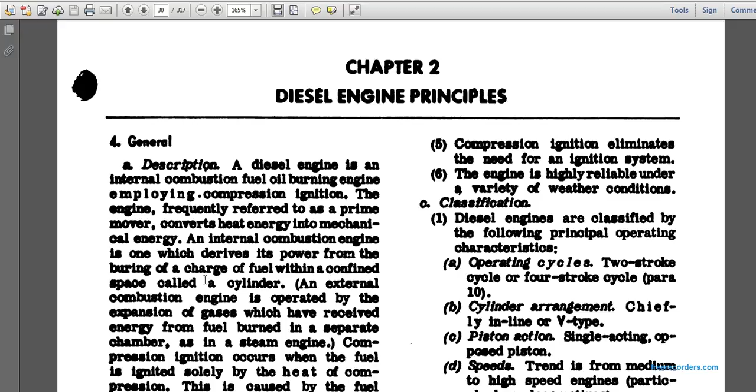An internal combustion engine derives its power from the burning of a charge of fuel confined in a space called the cylinder. An external combustion engine is operated by the expansion of gases which have received energy from fuel burned in separate chambers, as in the steam engine. Compression ignition occurs when the fuel is ignited solely by the heat of compression, caused by the fuel coming into contact with highly compressed and hence highly heated air in the cylinders.

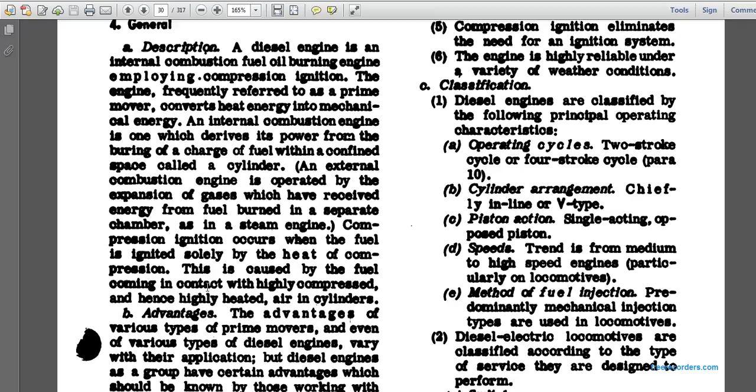The various types of prime movers, including the various types of diesel engines, vary in their application, but the diesel as a group has certain advantages which should be known by those working with them.

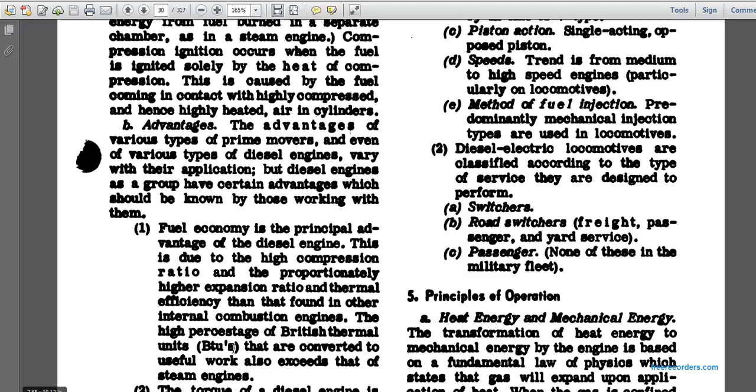Fuel economy is the principal advantage of the diesel engine. This is due to the high compression ratio and the proportionally high expansion ratio, giving thermal efficiency not found in other internal combustion engines. The high percentage of British thermal units (BTUs) that are converted to useful work also exceeds that of the steam engine.

The torque of the diesel engine is fairly constant throughout the speed range, and therefore the engine pulls well at low speeds.

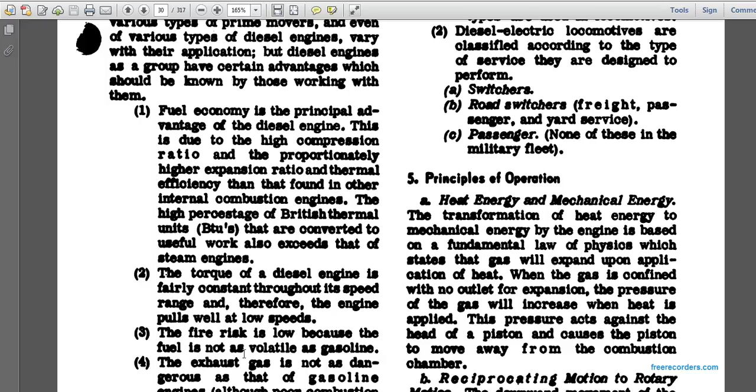The fire risk is low because the fuel is not as volatile as gasoline. The exhaust gas is not as dangerous as that of a gasoline engine, although poor combustion causes a high concentration of carbon monoxide fumes.

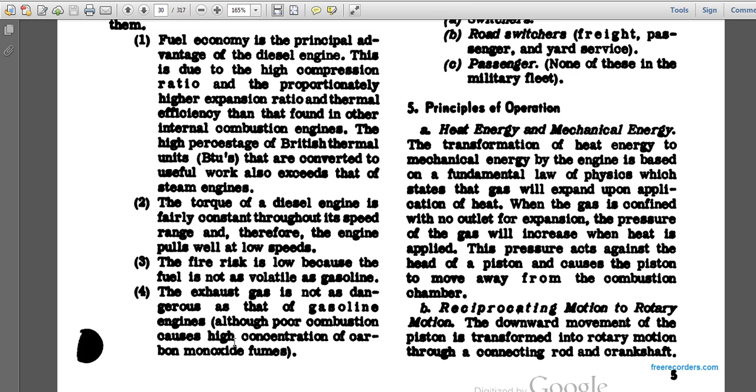The compression ignition eliminates the need for an ignition system. The engine is highly reliable under a variety of weather conditions.

Classification: Diesel engines are classified by the following operating principles and characteristics. A, the operating cycle: 2-stroke cycle or 4-stroke cycle. B, the cylinder arrangement: chiefly inline or V-type. C, the piston action: single-acting or opposed piston. D, the speed, ranging from medium to high-speed engines, particularly on locomotives. E, the method of fuel injection, predominantly the mechanical injection type used in locomotives.

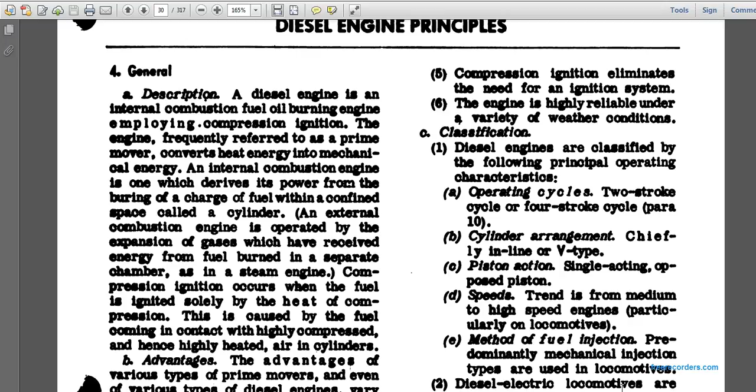Diesel electric locomotives are classified according to the type of service they are designed to perform: switchers, road switchers, which handle freight and passenger yard services. None of these are military fleet.

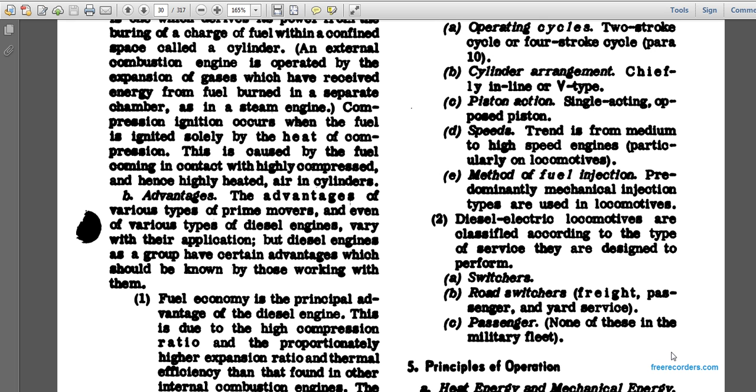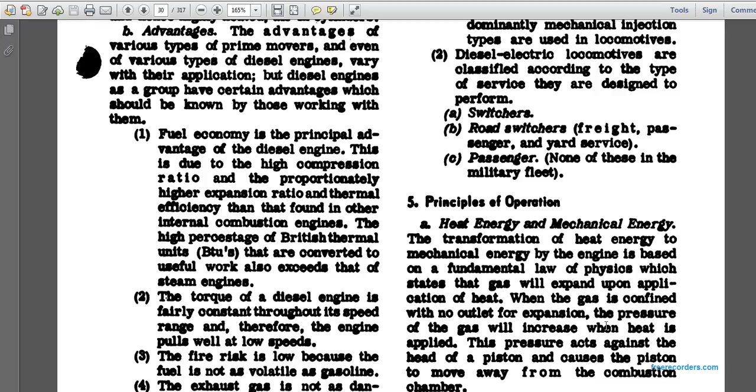The principles of operation, the heat energy and the mechanical energy, the transformation of heat energy to mechanical energy is based on the fundamental law of physics, which states that gas will expand upon application of heat. When the gas is confined with no outlet for expansion, the pressure of the gas increases with the heat. The pressure acts against the head of the piston, causing the piston to move away from the combustion chamber.

The reciprocating motion becomes rotary motion. The downward movement of the piston is transformed into rotary motion through the connecting rod and the crankshaft.

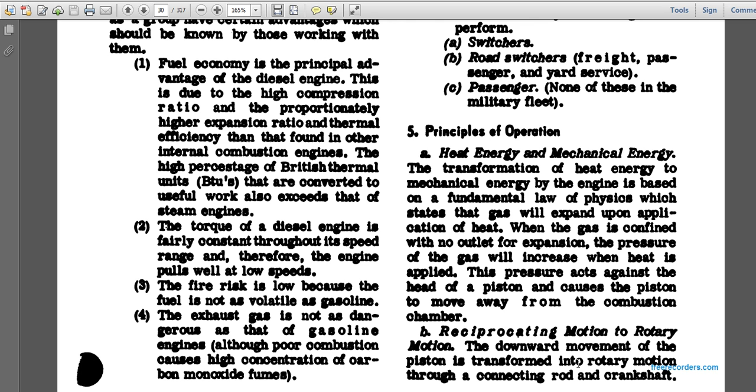The cylinder is a hollow tube closed at the upper end by the cylinder head. The piston moves inside the cylinder. The connecting rod is straight, and its upper end is attached to the bottom of the piston.

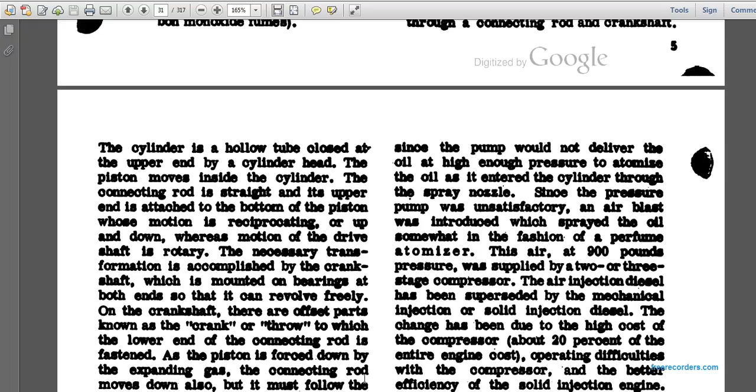When the motion is reciprocating up and down, while the motion of the drive shaft is rotary, the necessary transformation is accomplished by the crankshaft, which is mounted in bearings at both ends so that it can revolve freely. One of the crankshaft's offset parts is known as the crank or the throw, to which the lower end of the connecting rod is fastened.

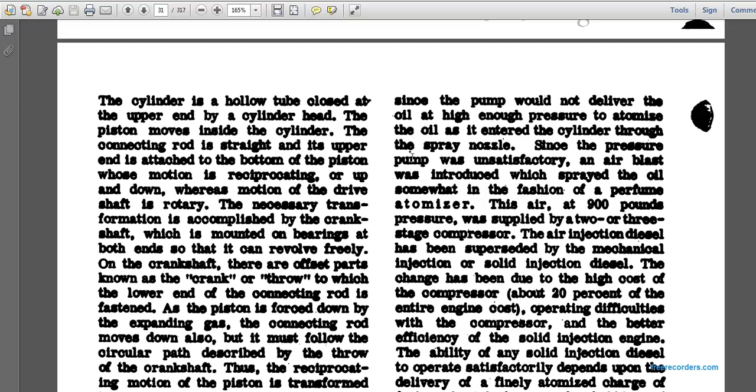The piston is forced down by the expanding gas, the connecting rod moves down, and it must follow the circular path described by the throw of the crankshaft. Thus, the reciprocating motion of the piston is transformed into the rotating movement of the crankshaft.

Factors necessary for proper function of the diesel engine: four factors are necessary for proper combustion in the diesel engine: air, fuel, compression, and ignition.

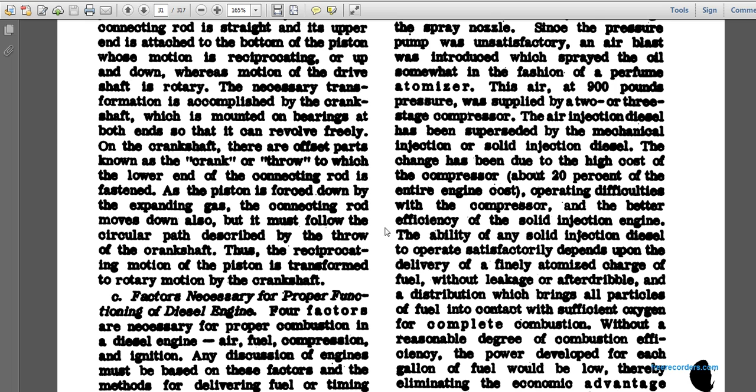Any discussion of the engines must be based on these factors and the methods of delivering the fuel and timing of the combustion chamber. The principal difference between the diesel engine and the gasoline engine is the method of igniting the fuel.

Pure air is compressed to a high temperature before any fuel is delivered in a diesel engine, which differs from the air-fuel mixture delivered by carburetors in gasoline engines.

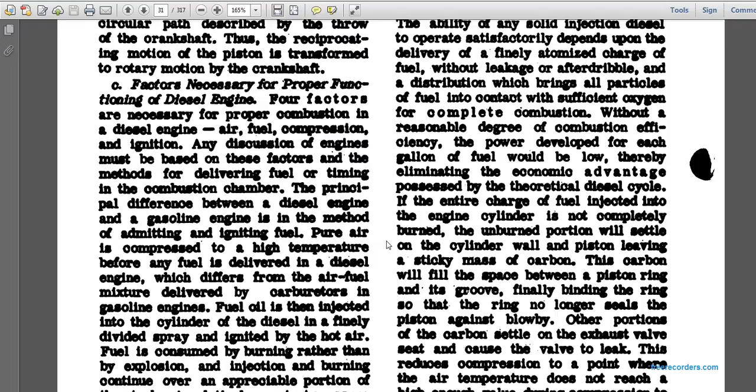Fuel oil is injected into the cylinder of the diesel and finely divided spray and ignited by the hot air. The fuel is consumed by burning rather than explosion, continuing through the appreciable portion of the stroke. Relatively constant pressure is thereby maintained during the entire power stroke. The characteristic of the diesel engine classification is the constant pressure engine.

Combustion principles: In the first diesel engine, fuel oil was injected into the cylinder by the pressure of the pump. The result was poor, since the pump was not delivering the oil at high enough pressure to atomize the oil that entered the cylinder through the spray nozzle.

Since the pressure of the pump was insufficient, the injection of the air blast introduced with the sprayed oil somewhat in the fashion of a perfume atomizer. This air at 900 pounds of pressure was supplied at 2 to 3 stages of compressors.

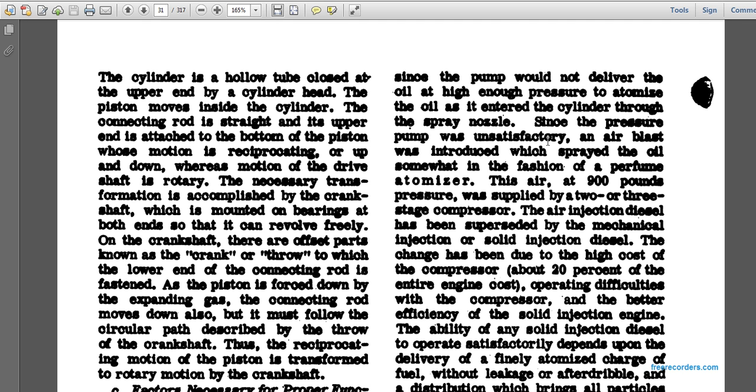The air injection diesel had been superseded by the mechanical injection or solid injection diesel. The change has been due to the high cost of the compressor. About 20% of the entire engine cost, operating difficulties with the compressor.

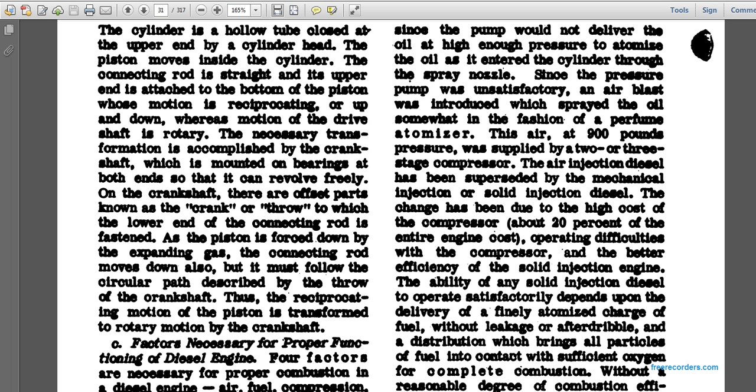The better efficiency of the solid injection engine and its ability to operate satisfactorily depends upon the delivery of finely atomized fuel charges without leakage or afterdribble, and distribution which brings all particles of the fuel into contact with sufficient oxygen to complete combustion with a reasonable degree of combustion efficiency.

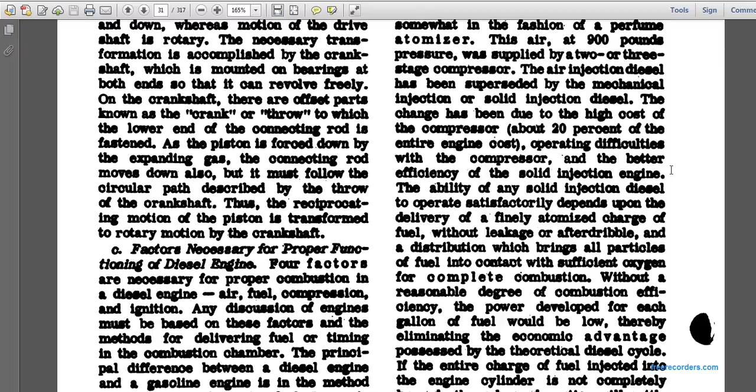The power developed for each gallon of fuel would be low, thereby eliminating the economic advantage possessed by the theoretical diesel engine cycle. If the entire charge of fuel injected into the engine cylinder is not completely burned, and the unburned portion will settle on the cylinder wall and piston.

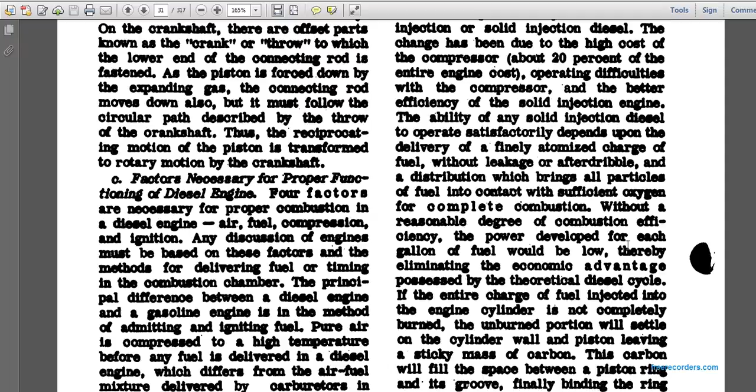This leaves a sticky mass of carbon. The carbon will build up between the piston ring and its groove, finally binding the ring so that it no longer seals against the piston, causing blow-by.

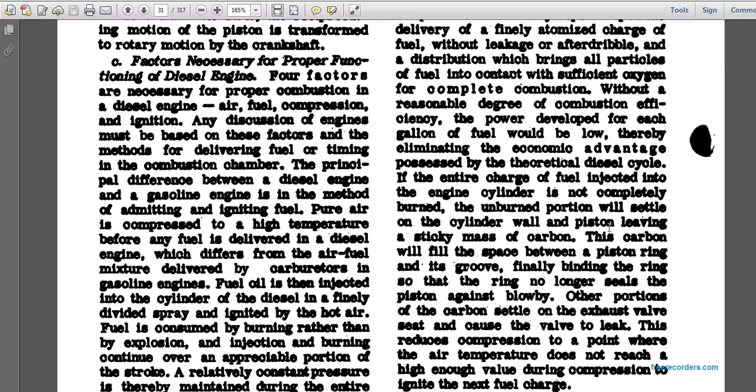Other portions of the carbon settle on the exhaust valve seat, causing the valve to leak. This reduces compression to the point where the air temperature does not reach a high enough value during compression to ignite the next fuel charge.

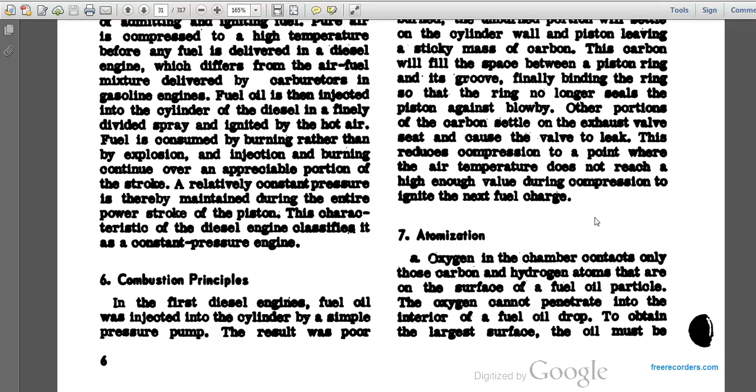Atomization: The oxygen charge in the chamber contacts only those carbon and hydrogen atoms that are on the surface of the fuel oil particle. The oxygen cannot penetrate into the interior of the fuel oil drop.

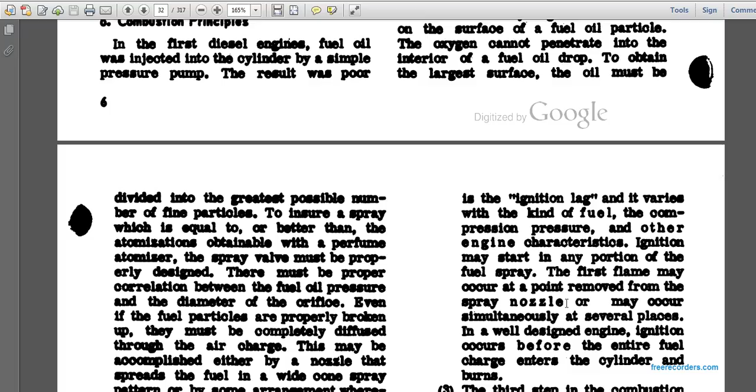To obtain the largest surface area, the oil must be divided into the greatest possible number of fine particles to ensure a spray equal to or better than the atomization obtained by perfume atomizers.

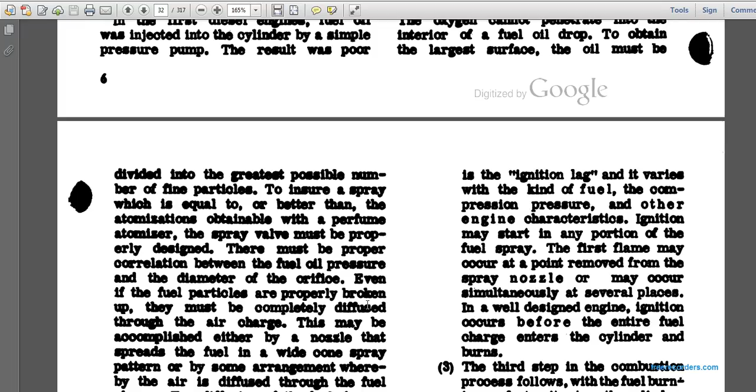This may be accomplished either by the nozzle spreading the fuel in a wide cone spray pattern, or by some arrangement where the air is diffused through the fuel charge.

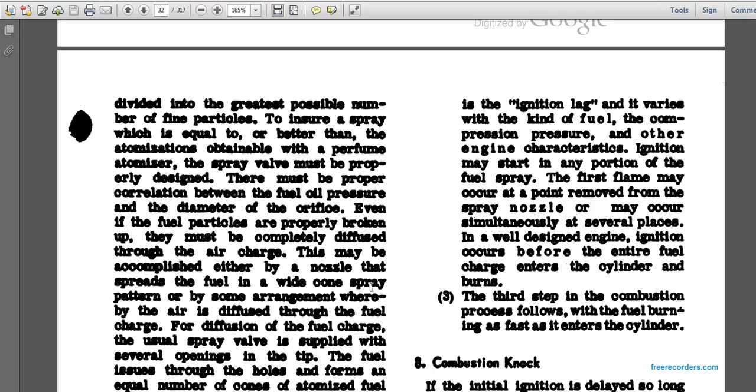Usually the spray nozzle is supplied with several openings in the tip. The fuel issues through the holes, forming an equal number of cones of atomized fuel which effectually fill the combustion space.

Combustion space. I lost my spot.

Even the fine particles broken down must be completely diffused in the air charge. This may be accomplished by the nozzle spraying the fuel in a wide spray pattern, in some arrangement where it diffuses through the fuel charge.

This diffusion of the fuel charge: usually the spray nozzle is supplied with several openings in the tip. The fuel issues through the holes, forming equal numbers of cones atomized efficiently within the combustion space in the engine cylinder.

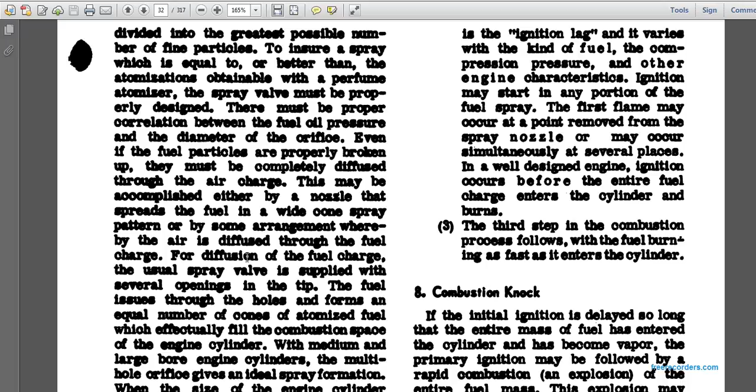With a medium to large bore engine cylinder, the multi-hole orifice gives an ideal spray formation. As the size of the engine cylinder decreases, high-speed engines are classed as small bore, and the amount of fuel injected into the engine cylinder is very small. The diameter of each of the spray valve openings must be exceedingly small.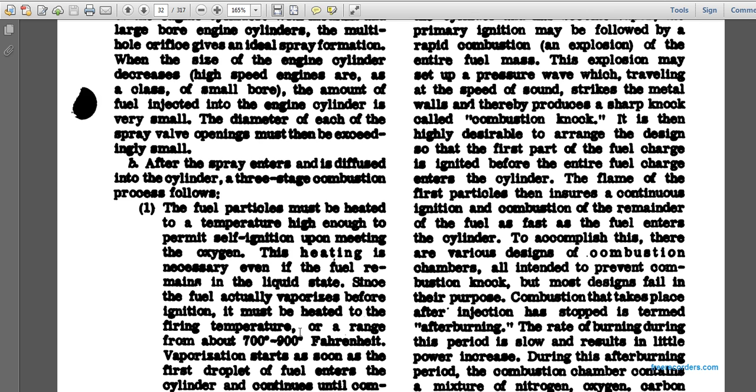After the spray enters into the cylinder, a three-stage combustion process follows. The fuel particles must be heated to a temperature high enough to permit self-ignition upon meeting oxygen. This heating is necessary even if the fuel remains in a liquid state. Since the fuel actually vaporizes before ignition, it must be heated to a firing temperature range of about 700 to 900 Fahrenheit. Vaporization starts as soon as the first droplet entering the cylinder and continues until combustion occurs.

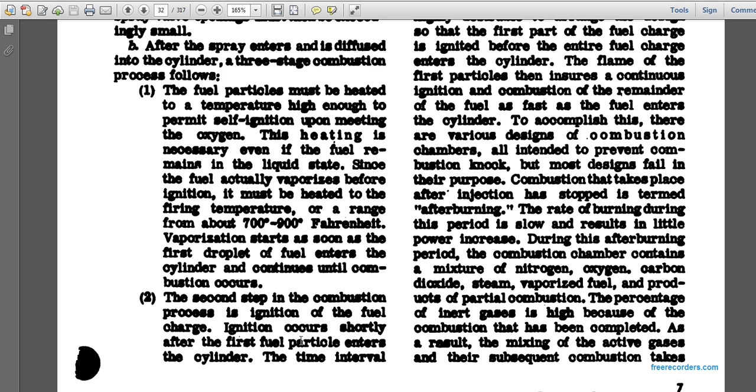The second step of the combustion process is ignition of the fuel charge. Ignition occurs shortly after the first fuel particles enter into the cylinder. This time interval is the ignition lag, which varies with the kind of fuel, the compression pressures, and other engine characteristics. Ignition may start in any portion of the fuel spray; the first flame may occur at a point removed from the spray nozzle, or may occur simultaneously at several places. In a well-designed engine, ignition occurs before the entire fuel charge enters the cylinder and burns.

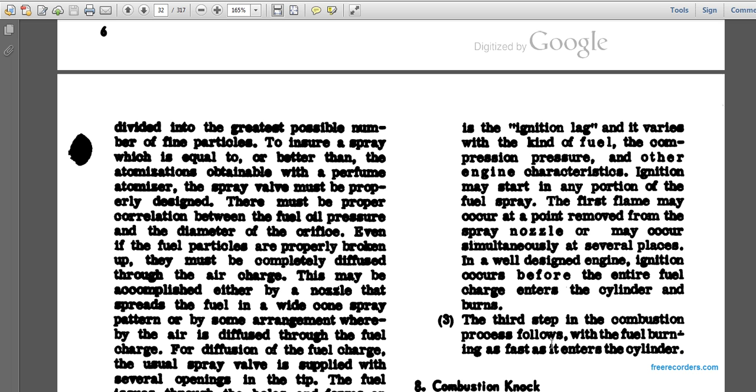The third step in the combustion process follows, with the fuel burning as fast as it enters into the cylinder.

Combustion knock: if the initial ignition is delayed so long that the entire mass of fuel entered into the cylinder has become vapor, the primary ignition may be followed by rapid combustion or explosion of the entire fuel mass. The explosion may set up a pressure wave which, traveling at the speed of sound, strikes the metal of the walls, thereby producing a sharp knock called the combustion knock.

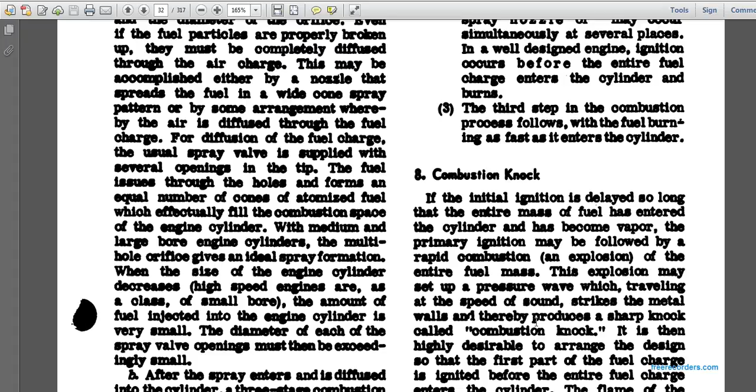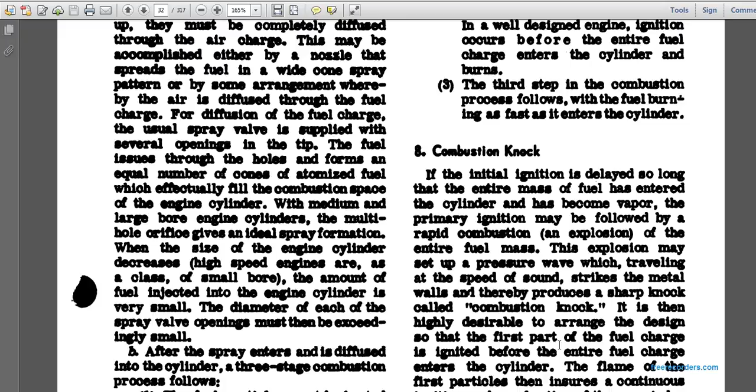It is therefore highly desirable to arrange the design so that the first part of the fuel charge is ignited before the entire fuel charge enters into the cylinder. The flame of the first particles ensures continuous ignition and combustion of the remainder of the fuel as it enters the cylinder. To accomplish this, there are various designs of combustion chambers, all intended to prevent combustion knock.

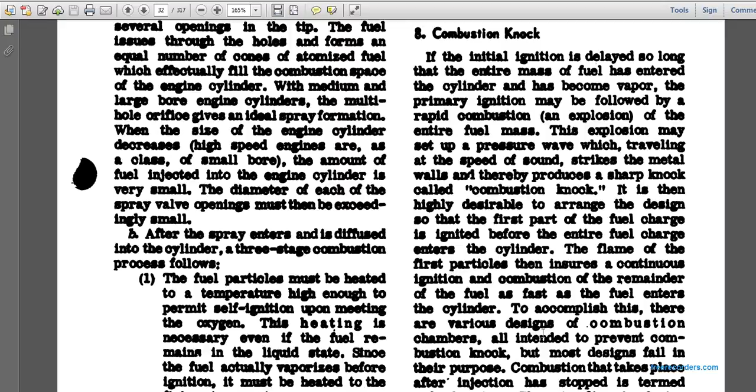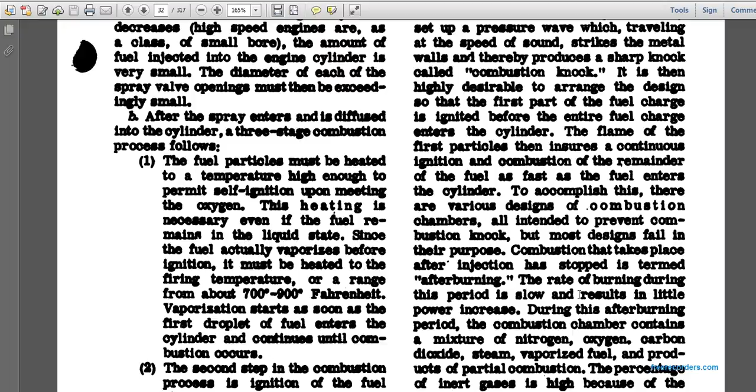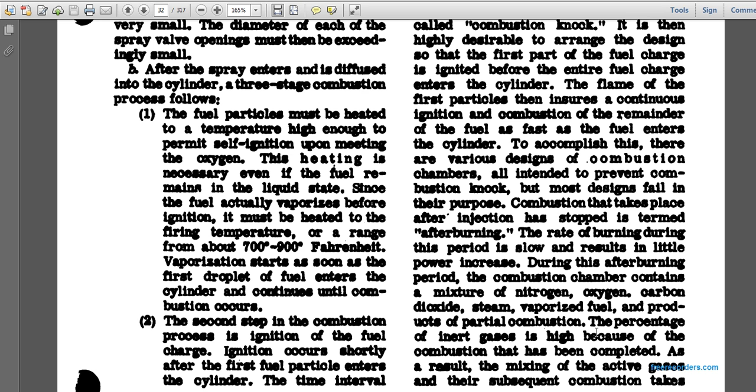The late burning at a low expansion rate decreases the overall cycle efficiency of the engine, although the final combustion efficiency may be high. There is difficulty in obtaining the proper mixture of fuel and air, securing the efficiency of combustion, especially with increasing engine speed.

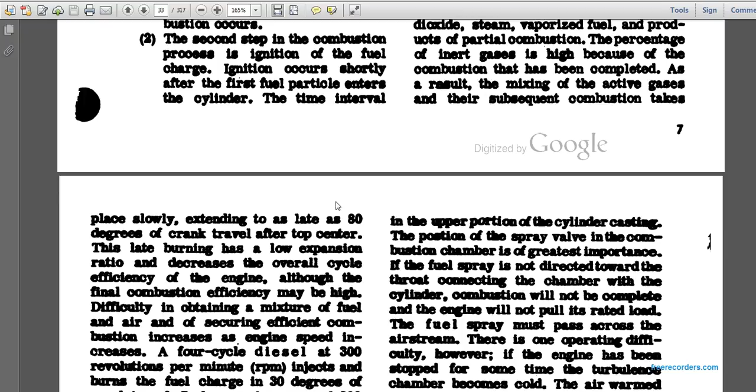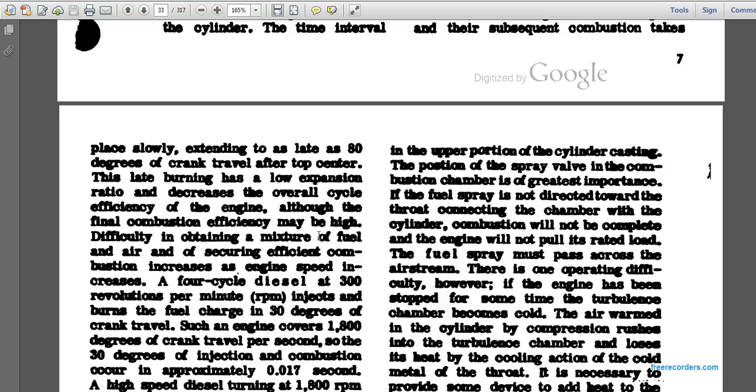A 4-cycle diesel engine at 300 revolutions per minute injects and burns the fuel charge in 30 degrees of crank travel. Such an engine covers 1800 degrees of crank travel per second, so 30 degrees of injection means combustion occurs in approximately 0.017 of a second.

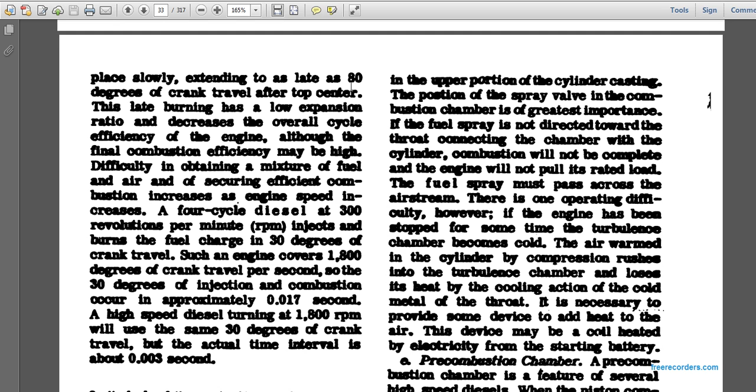The high-speed diesel engine turning at 1800 RPM will use this same 30 degrees of crank travel, but the actual time interval is about 3 thousandths of a second.

Method of mixing air with fuel: generally, the method of moving air within the diesel engine cylinder across the fuel stream varies, and different engine methods are common, such as those found in locomotive or military fleet engines, as described below. The entrance swirl: the air flowing into the engine cylinder may follow a circular path, continuing to move during the compression stroke as the fuel is sprayed into the cylinder, with the air moving through the fuel spray.

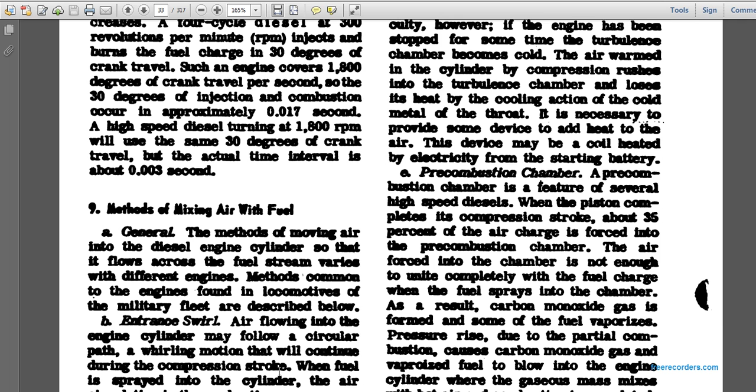This increases the mixture of the air and the fuel. Piston swirl. The piston has the concave crown. The air between the cylinder head and the outer surface of the piston crown is forced into the concave section as the piston approaches the

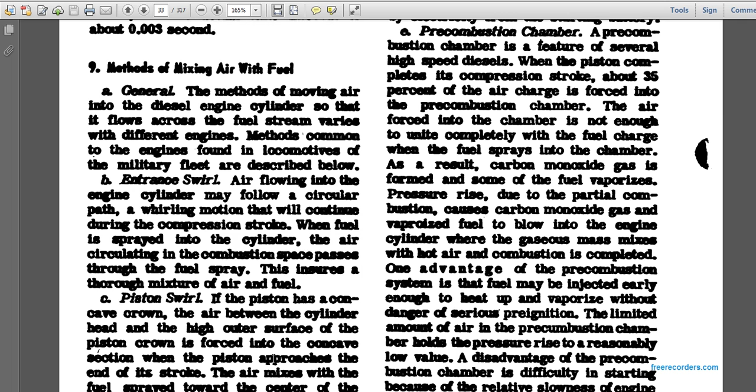Piston swirl. The piston has a concave crown, and the air between the cylinder head and the higher outer surfaces of the piston crown is forced into the concave as the piston approaches the end of the stroke, and the air mixes with the fuel spray toward the center of the piston.

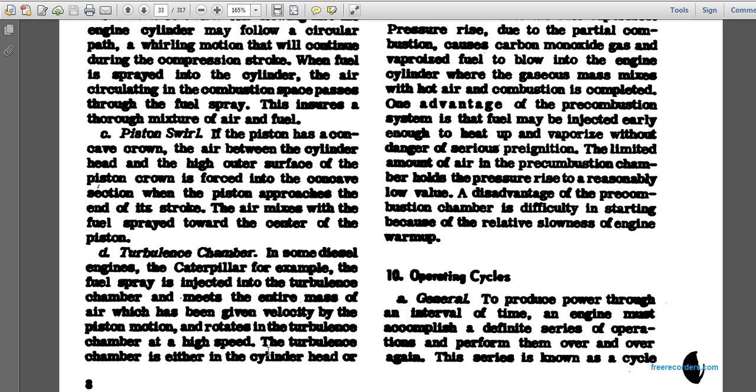The turbulence chamber. In some diesel engines, the Caterpillar for example, the fuel spray is injected into the turbulence chamber and meets the entire mass of the air, which has been given velocity by the piston motion and rotates in the turbulence chamber at high speed. The turbulence chamber is in either the cylinder head or the upper portion of the cylinder casting. The position of the spray valve of the combustion chamber is of the greatest importance. If the fuel spray is not directed toward the throat connecting the chamber with the cylinder, combustion will not be complete and the engine will not pull its rated load; the fuel spray must be across the airstream. There is an operating difficulty, however.

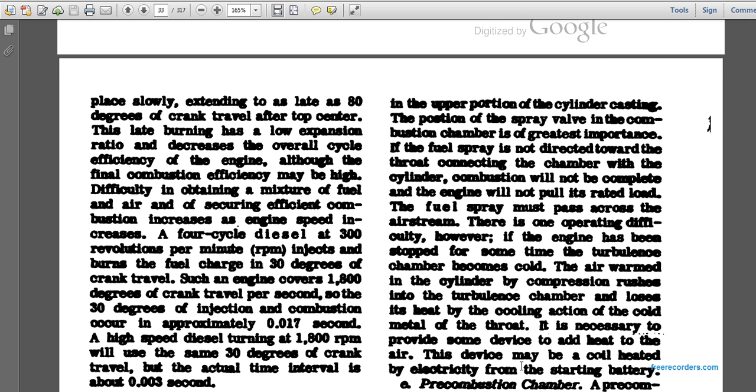If the engine has been stopped for some time, the turbulence chamber becomes cold. The air warmed in the cylinder by compression rushes into the turbulence chamber and loses its heat through the cooling action of the cool metal of the throat. It's necessary to provide some device to add heat to the air. The device may be a coil heated by electricity from the starting battery.

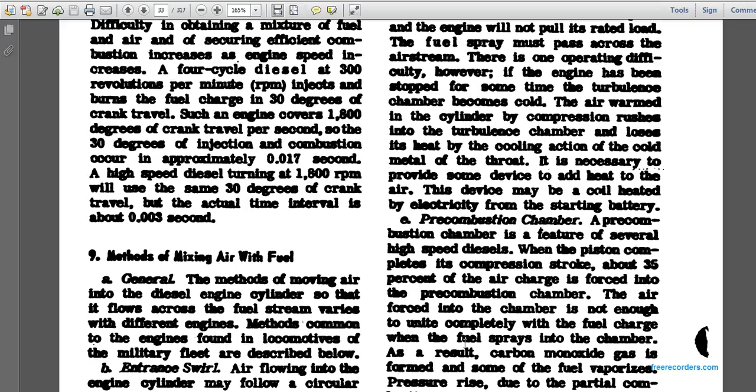Pre-combustion chamber. The pre-combustion chamber is a feature of several high-speed diesels. When the piston completes the compression stroke, about 35% of the air charge is forced into the pre-combustion chamber. The air forced into the chamber is not enough to unite completely with the fuel charge. When the fuel sprays into the chamber, carbon monoxide is formed, and some of the fuel vaporizes; partial combustion and cause carbon monoxide gas and vaporized fuel to blow into the engine cylinder, where the gas mass mixes with the hot air and combustion is completed.

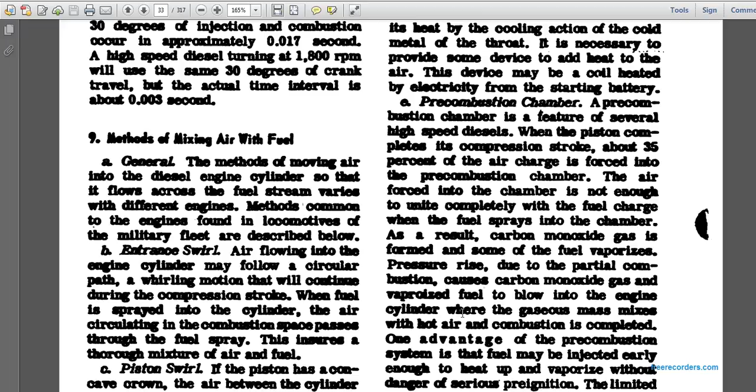One advantage of the pre-combustion system is that the fuel may be injected early enough to heat up and vaporize without the danger of serious pre-ignition, and the limited volume of the pre-combustion chamber holds the pressure at a reasonably low value. A disadvantage of the pre-combustion chamber is difficult starting because of the relative slowness of the engine warm-up.

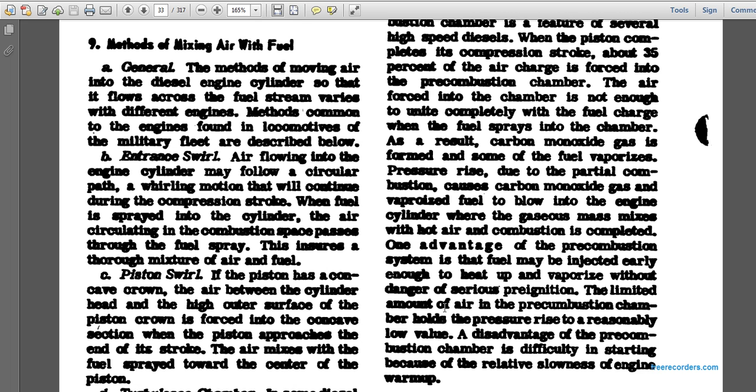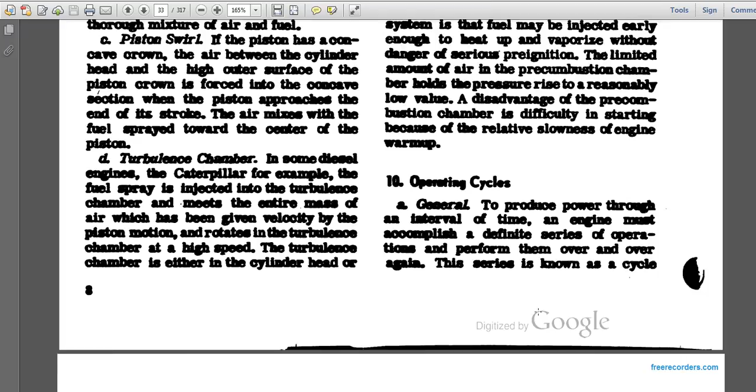Operating cycles. Generally, to produce power through an interval of time, an engine must accomplish a definite series of operations, performing them over and over again. The series is known as a cycle, in which suction, compression, ignition, expansion, and exhaust take place in the order listed. An engine that requires four strokes of the piston, two revolutions of the crankshaft, to complete the cycle is known as a 4-cycle engine. Figure 1-1. An engine completing the cycle in two strokes of the piston, one revolution of the crankshaft, is known as a 2-stroke engine.

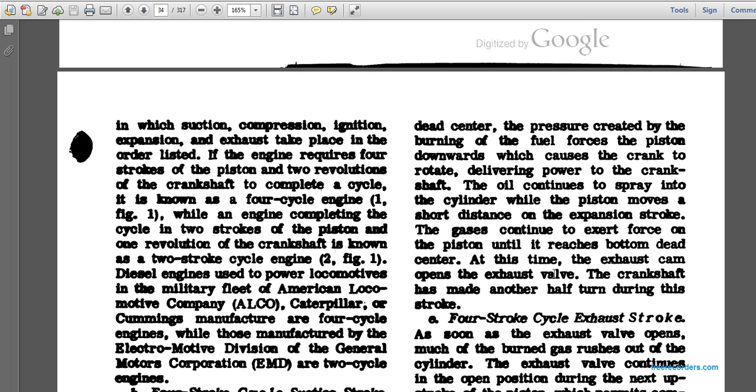Figure 1. The diesel engines used in the locomotives of the military fleet: American Locomotive Company, ALCO, Caterpillar, and Cummins manufacture 4-cycle engines; those manufactured by the Electro-Motive Division of the General Motors Corporation, EMD, are 2-cycle engines. The 4-stroke cycle: the suction stroke.

The suction stroke begins with the piston at top dead center. The piston moves downward, and the charge of fresh air is drawn into the cylinder through the inlet valve, which is held open by the cam. The air passage is closed as the piston reaches the bottom of the stroke. The crankshaft has then made a half revolution during the stroke.

The second stroke of the cycle, compression. The piston reaches the bottom of the stroke, and the inlet valve is closed by the spring as the high point of the cam rotates from under the push rod. Bottom dead center has been passed, the piston being forced upward toward the cylinder head. Inlet and exhaust valves are closed, and the upward travel of the piston compresses the air in the cylinder. At the end of the compression stroke, a charge of oil is injected through the spray valve into the cylinder.

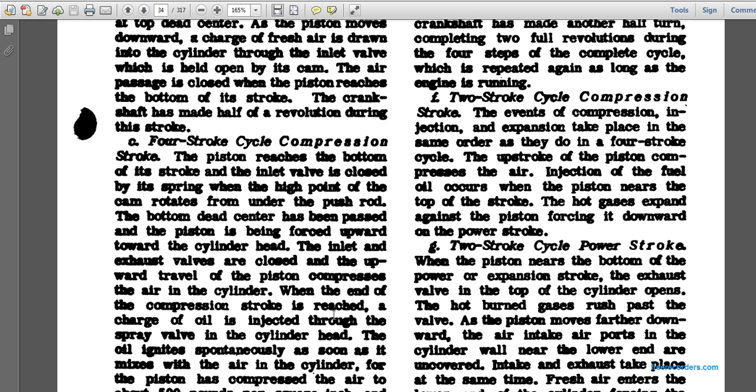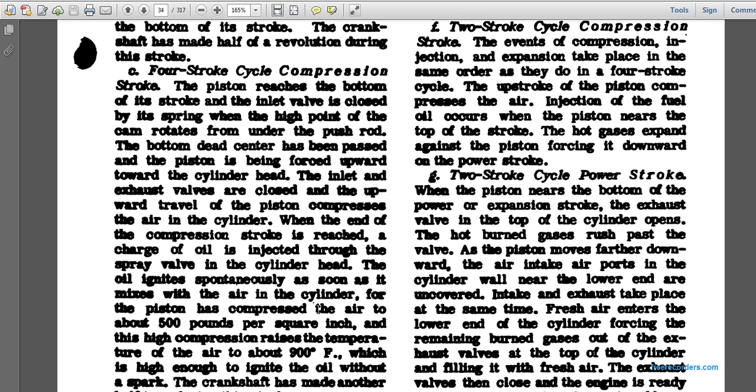The oil ignites spontaneously as soon as it mixes with the air in the cylinder. The piston compresses the air to about 500 pounds per square inch. High compression raises the temperature of the air to about 900 degrees Fahrenheit, which is high enough to ignite the oil without a spark. The crankshaft has made another half turn during the stroke.

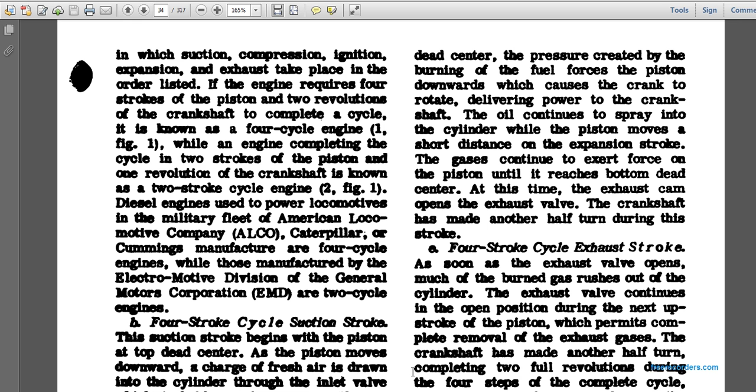The 4-stroke cycle expansion stroke starts as soon as the crank moves past top dead center. The pressure created by the burning of the fuel forces the piston downward to cause the crank to rotate, delivering power to the crankshaft. The oil continues to spray into the cylinder while the piston moves a short distance. With the expansion stroke, the gas continues to exert force on the piston until it reaches bottom dead center. At this time, the exhaust cam opens the exhaust valve, and the crankshaft has made another half turn during this stroke.

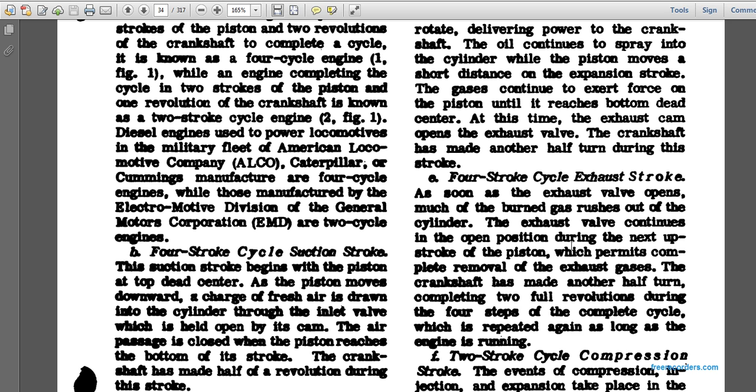The 4-stroke cycle exhaust stroke. As soon as the exhaust valve is open, most of the burned gas rushes out of the cylinder. The exhaust valve continues in the open position during the next upward stroke of the piston, which permits complete removal of the exhaust gases. The crankshaft has made another half turn, completing 2 full revolutions during the 4 strokes of the cycle, which is repeated as long as the engine is running.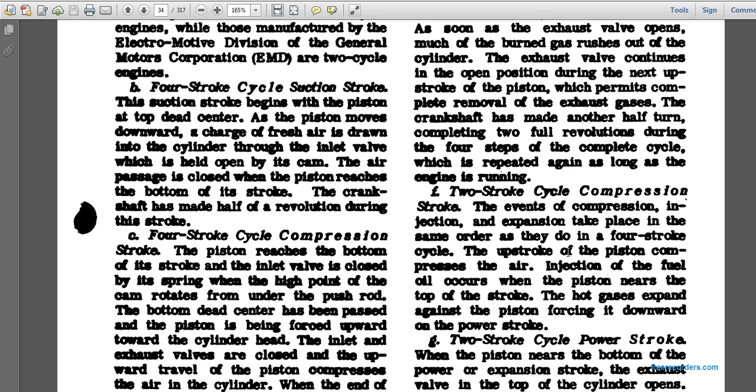The 2-stroke cycle. Compression, injection, and expansion take place in the same order as in the 4-stroke cycle. The upstroke of the piston compresses the air, and the injection of the fuel occurs with the piston near the top of the stroke. The gases expand against the piston, forcing it downward on the power stroke. In the 2-stroke cycle power stroke, the piston nears the bottom of the expansion stroke.

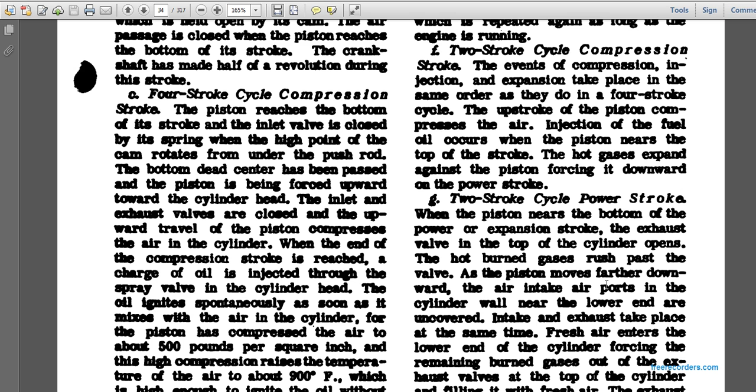The exhaust valve in the top of the cylinder opens and the hot burned gases rush past the valve. The piston moves farther down and uncovers the air intake ports in the cylinder wall near the bottom, and intake and exhaust take place at the same time. The fresh air enters low in the cylinder, forcing the remaining burned gas out of the exhaust valves at the top of the cylinder, filling it with fresh air. The exhaust valves close, and the engine is ready to start another cycle. The intake of fresh air and exhaust of the burned gases take place at the same time.

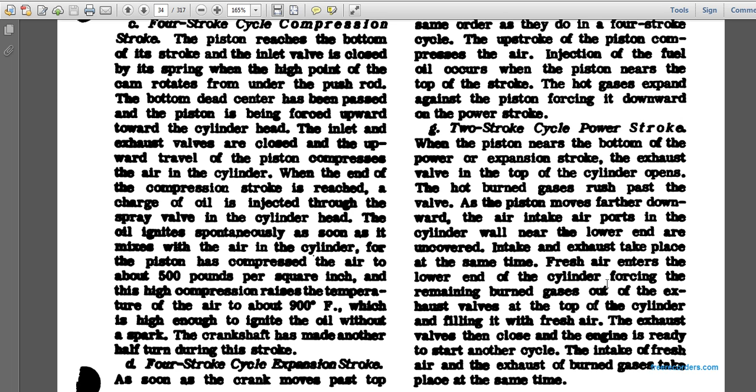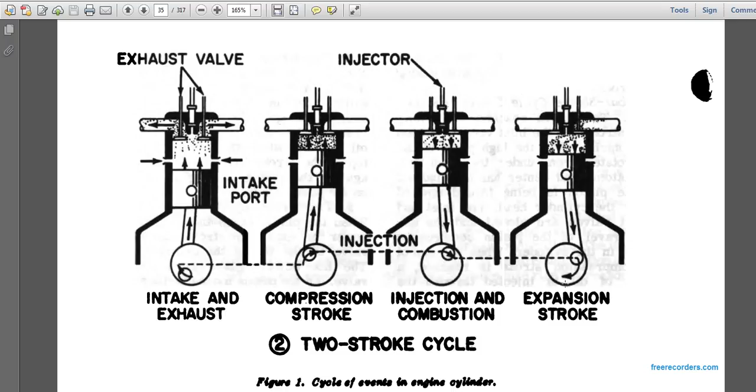Fuel injection. Fuel atomization and penetration. Fuel is forced into the combustion area at an extremely high pressure of 1200 psi to as high as 3500 psi, depending upon the design of the engine, which is required for assured atomization and mixing of the fuel and air in the combustion area. The compression pressure is approximately 500 psi. Therefore, the injection pressure is considerably higher. The higher the pressure, the better the atomization and mixing of the air and the fuel.

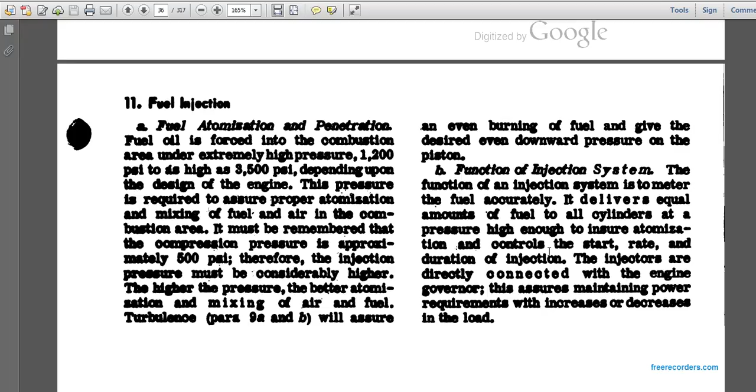Turbulence, paragraph 9a and b, will assure even burning of the fuel to give the desired downward pressure. The function of the injection system is to meter the fuel accurately, deliver equal amounts to all the cylinders at a pressure high enough to ensure atomization, and control the start, rate, and duration of the injection. The injectors are connected with the engine governor, which assures the power requirements are maintained, increasing or decreasing with an increase or decrease in load.

Part 2, Diesel Engine, Chapter 3, Railway Diesel Engine.